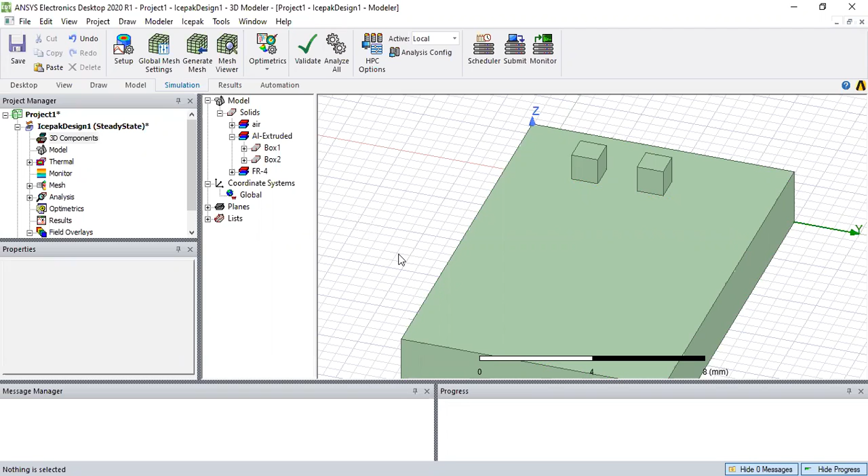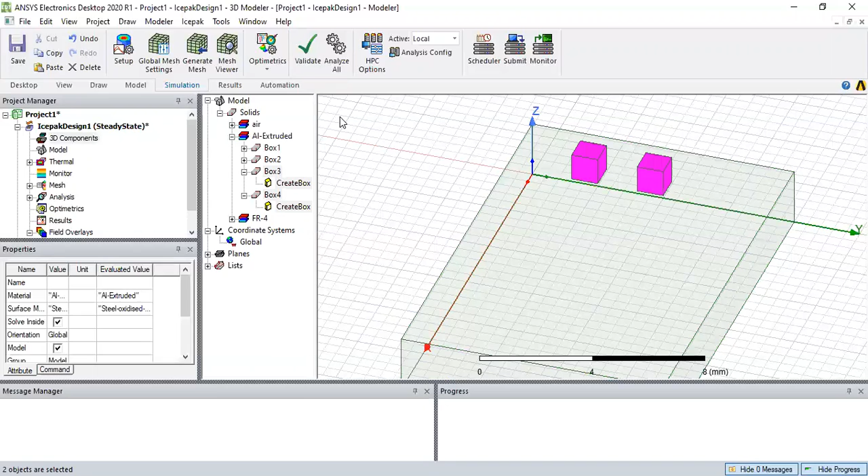First, let's double the number of components on a board, basically the blocks. Select both, and then copy and paste. You will notice that though the block number has doubled, we do not see them. That's because they are currently overlapping. For now, we'll have to move them, but instead of moving them one at a time by changing their point of origin, we'll move them by vector.

We have to go to Edit, and then to Arrange, and then Move. Now we can move them by vectors along the X, Y, or Z axis by holding X, Y, or Z on the keyboard. It says this again at the bottom in blue letters. So now select the top of one, hold X, and now I can freely move it in the X direction.

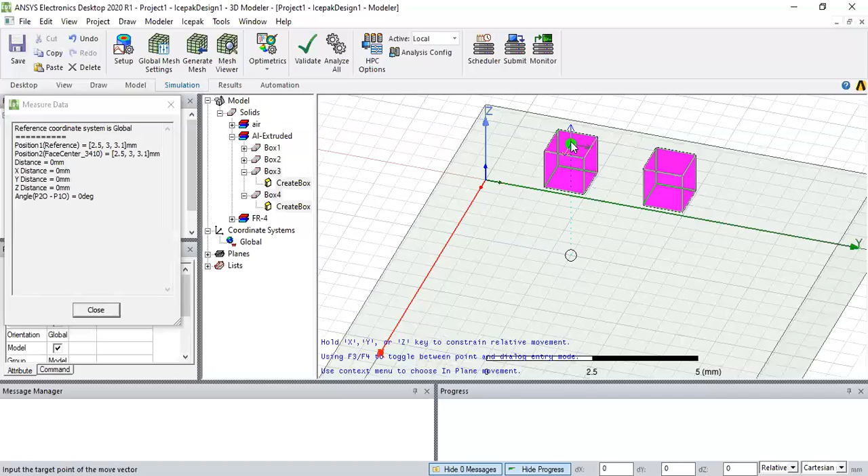If I do not hold X or Y or Z, then as you can see on the left, though I'm only moving it in the X direction, its height changes as well. But it needs to stay on the surface. So hold X and slide it down just a bit. And there we have it.

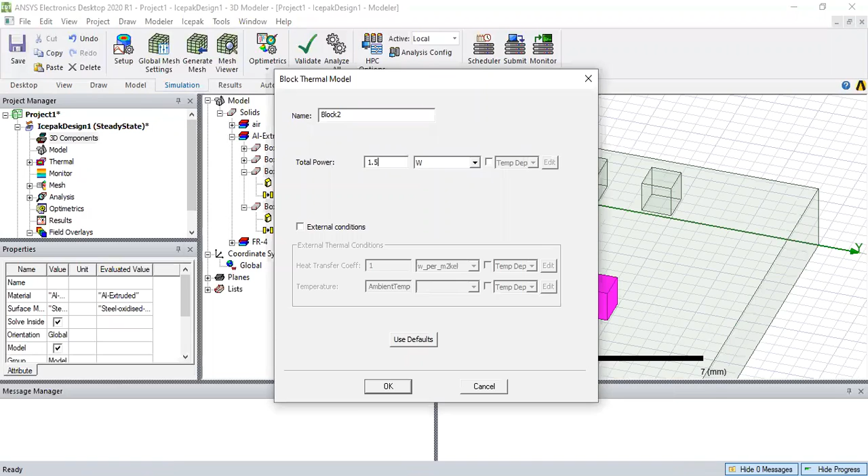Next, we'll also have to assign thermal energy to the blocks as well. Select both, as done last time. Assign thermal block and 1.5. Now we have 4 blocks and we can now create a heatsink. When generating a heatsink, it'll always appear at the global origin. To change this, we'll have to add a new coordinate system.

Go back to Draw, Operations, and Relative Coordinate System. We'll want to put it at the center of the block. And if you remember the dimensions of it, it is a 15 by 10 by 2.1. But if we want it to be above all components, we'll have to include the height of them. Because they're 1 by 1 blocks, we'll have to add plus 1 millimeter.

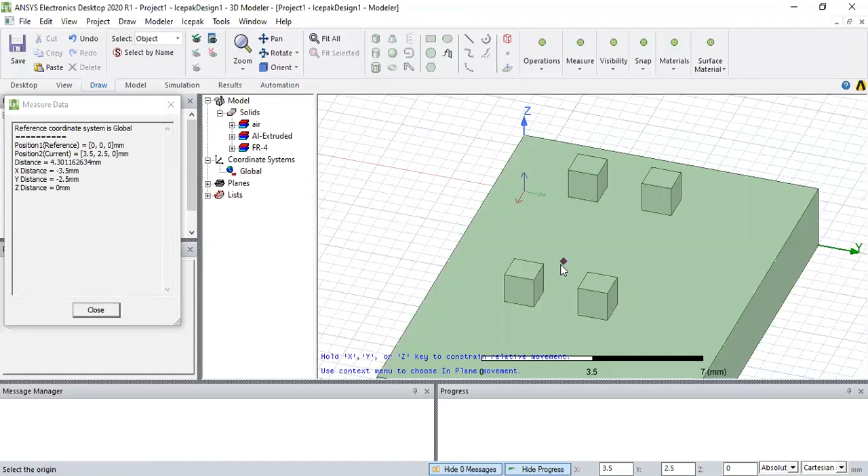So just click here, and then we'll change the origin here. Into Properties, an origin of 7.5, half of 15, 5, and then height 3.1. And there we have it. It is now at the center, at the height of all items.

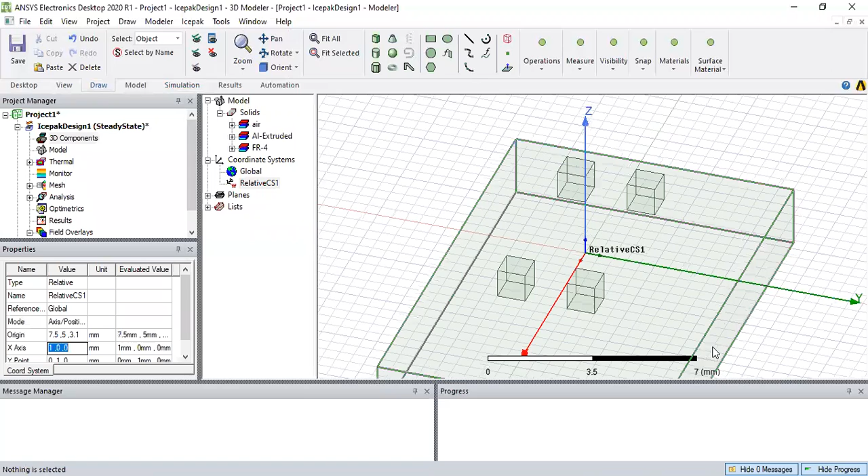Now to create the heatsink, go to 3D Components, right-click. We do not have any, so we have to create. You see Fan, Heatsink, and PCB. We'll select Heatsink, and you can already see an outline of the model there. Now we have to name it. It comes pre-named Heatsink 1. If you want to add more information, such as basing this on a real design, you can also include the company name and model number.

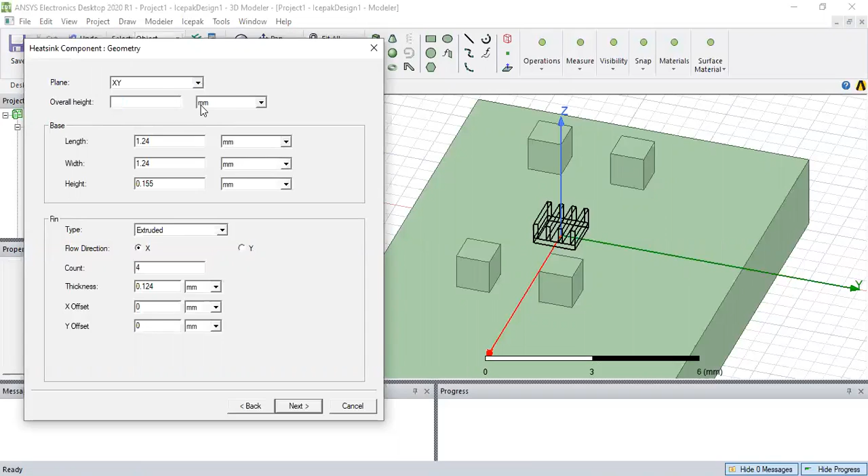So you can see here, this is the plane that it is currently the surface of, the XY plane. Changing this changes the direction of which way it's laying: YZ, ZX, and what we needed, the XY. Its overall height, such as the height of the entire sink, is changed here. We'll put 9.02.

Now the length and width also covers the base. So we'll just give it the same size as the board. Length crosses the x-axis, so that's a length of 15. Width is across the y-axis, that's a width of 10.

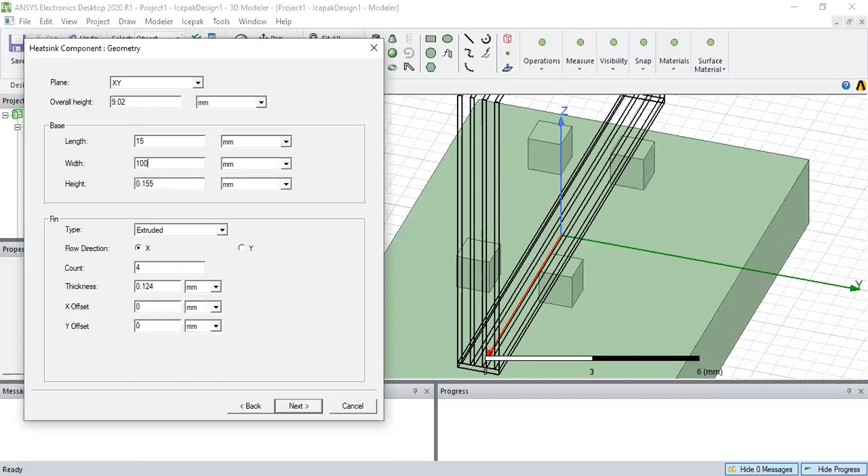Now, changing the height of the base does not change the height of the overall heatsink. That is done here. Changing the height of the base, I'll show you, only changes the base and will actually decrease the height of your fins at the top.

Relatively, the base is not that thick. It can be around, I would say, 10%. No, even less than 10%, probably around 5% of the height. You can check with other heat sinks you look up online. They will include some of their dimensions. For this one, we'll give it a size of 2.5 millimeters.

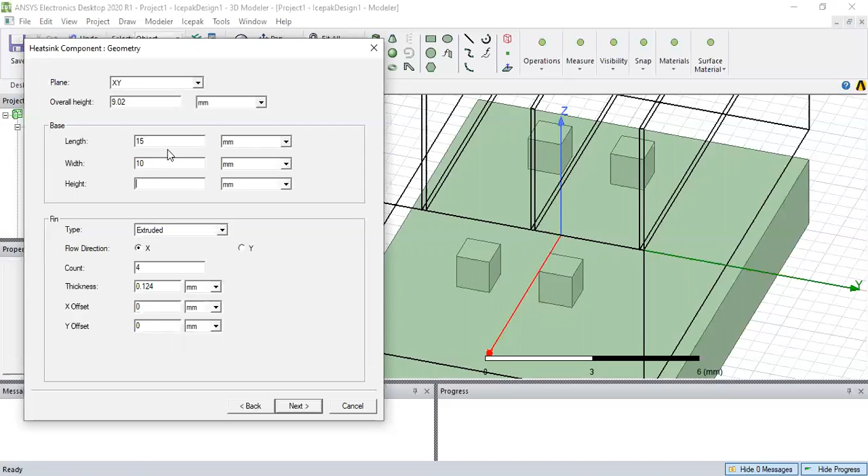And this heatsink type, as we can see here, is extruded. You just have 4 fins solid across the board. There is also cross-cut extrusion, which is similar, but now those bars are separated into single squares, which you can increase in size here in thickness. And then there are cylindrical pins, and now there are cylinders, so the airflow can move in any direction through them. Extruded is fine to stay with, unless you choose the cross-cut extrusion or cylindrical.

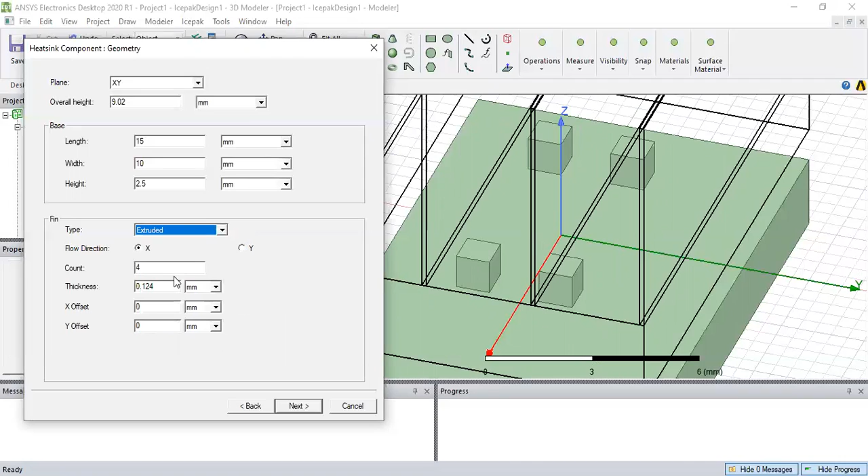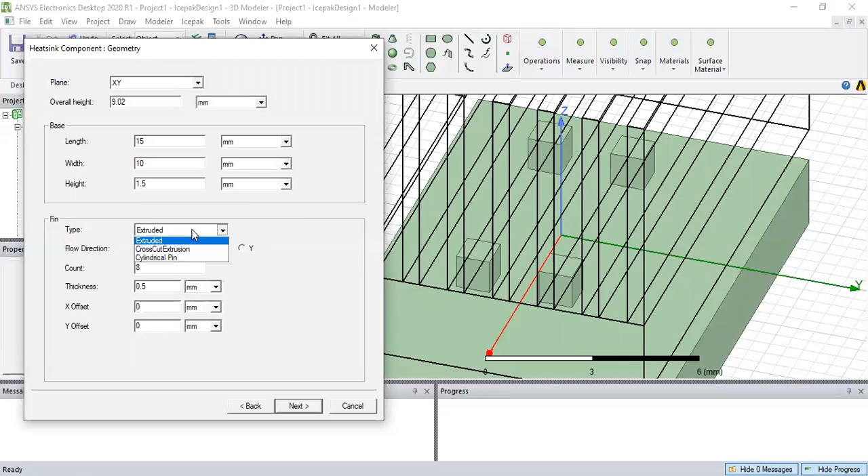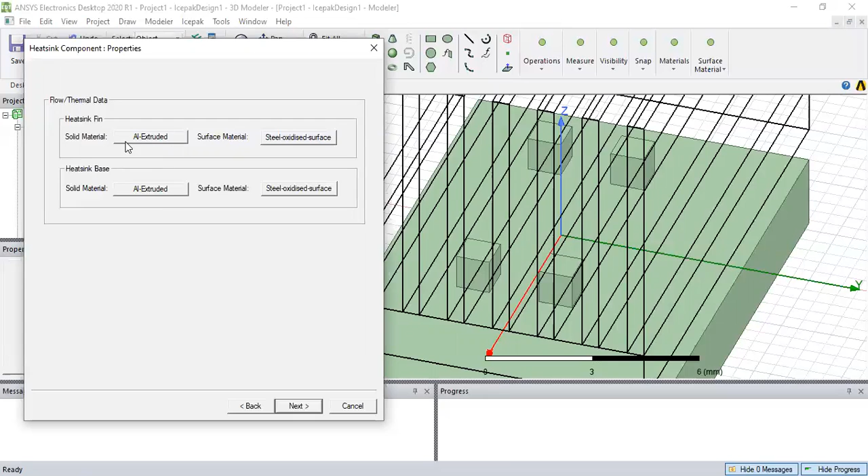We'll double the fin count to 8, thickness of 0.5, and we'll just decrease the base by 1. Make it 1.5 instead. There. This is currently fine for the material for the heatsink fins and base, and we can change it similar to how you change all other elements in the materials, but for now we'll just stick with this. And we'll finish, and there it is. It does come out as transparent, and I'll show you how to change that as well.

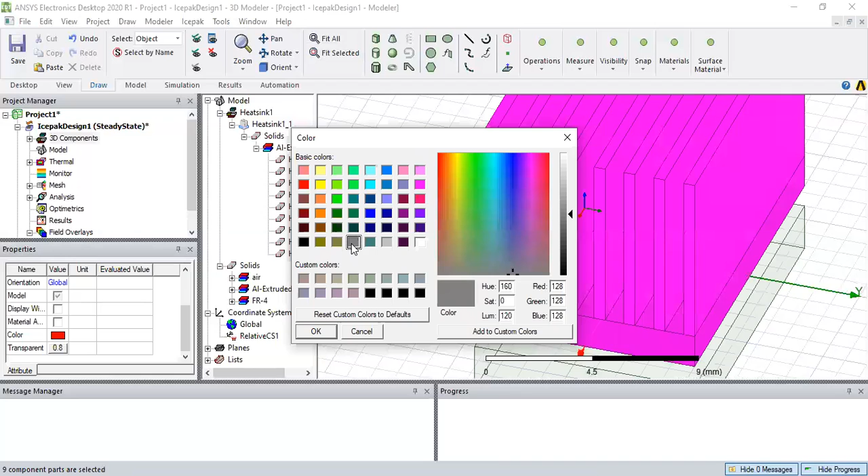You must go to Solids, right-click, select all, and then go to Properties. As you can see here, its color is red. We'll give it more of a metallic color. And from transparent, we want opaque. There. Now it is solid. Okay. And now we'll validate the simulation. And I will analyze all. I'll come back to you with the results.

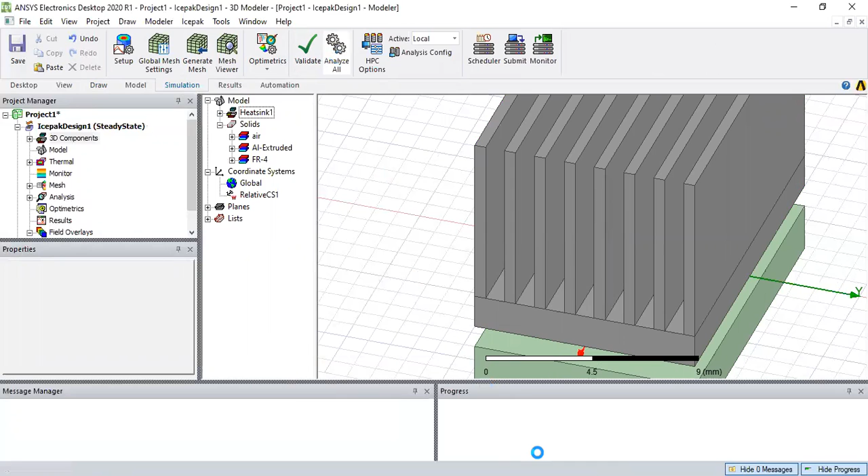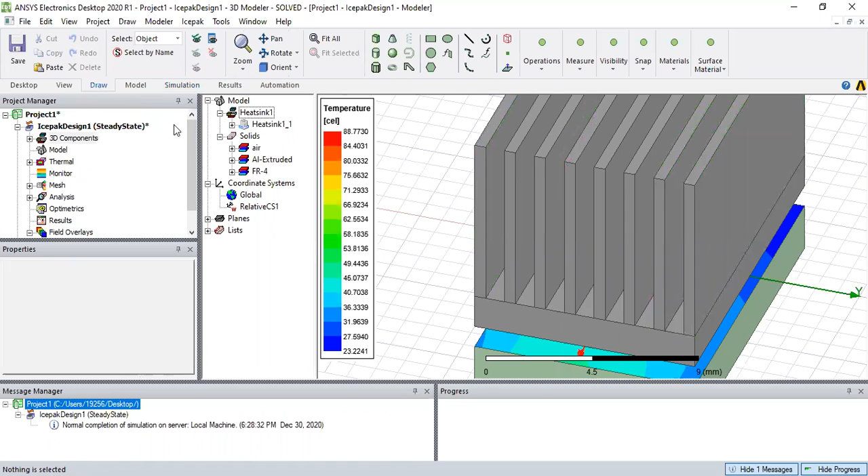And now the simulation has finished. Normal completion on server. And look at this. 88 degrees Celsius. In a previous video, if you have seen, this was in the near thousands. Now it is at a very nominal level, but we can't quite see the model. This can be fixed by hiding the heatsink. Go back to Draw, select the heatsink, and then hide it. It is still there and it is still active, similar to the region, but we just can't see it, and

that is fine. Go back to Field Overlays, select Temperature, and now I can see the surface at the junction points between the blocks is what we care about the most. If there is another item on top, we would care about that as well. But between the board and the component is where we're trying to minimize the most amount of heat. 88 degrees Celsius is fine, but with other types of heat sinks, you can get it lower.

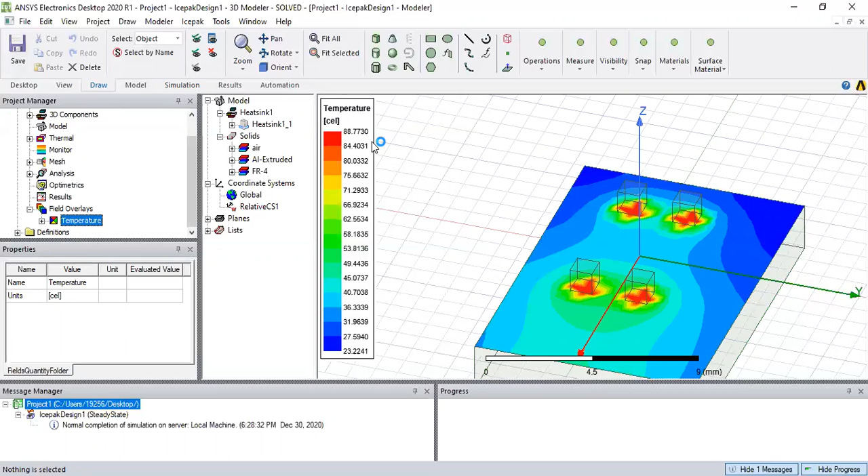A second way of adding a heatsink in Icepak is to select from its component library. First, we'll have to just delete the heatsink. And now we have to go to View, go to Component Libraries, and here we have it. You cannot actually see the heatsink until you select it. So if you see one, it's best to look it up online first. And if you don't and just randomly select it, you do not know what you're getting. I'll show you by doing this.

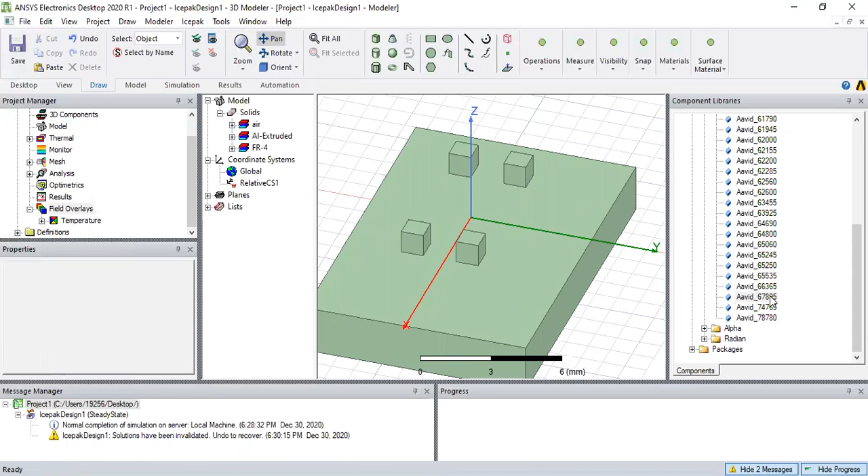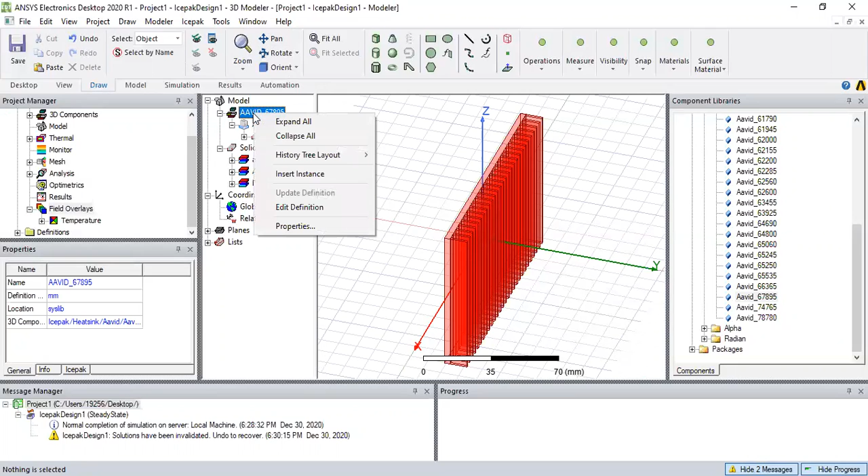It is far too large for the system, but I will still show you how you can manipulate this. Now you have to go back to the models, select it, right-click, and go to Edit Definition. You can see this name, but now we have to change the plane to XY, and that is fine. Now, we will simulate this again. I'll call you back when I have finished analyzing.

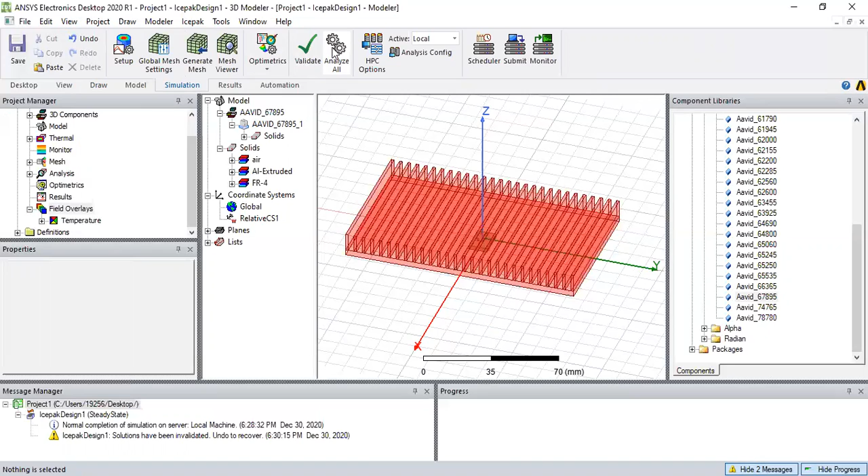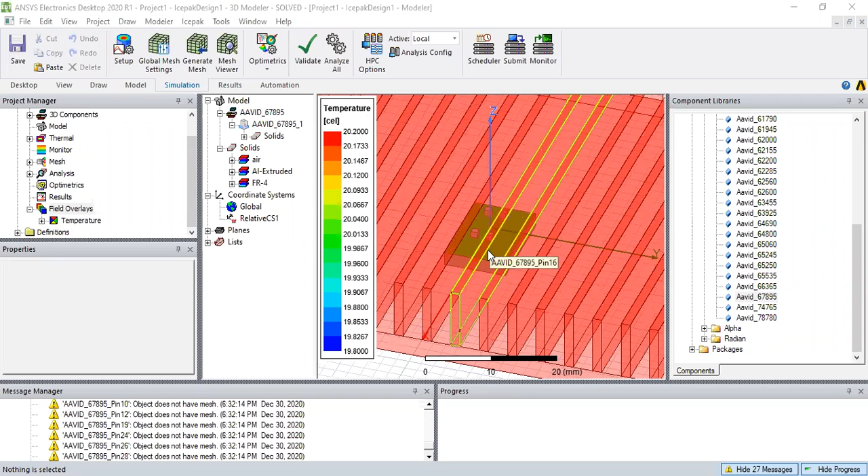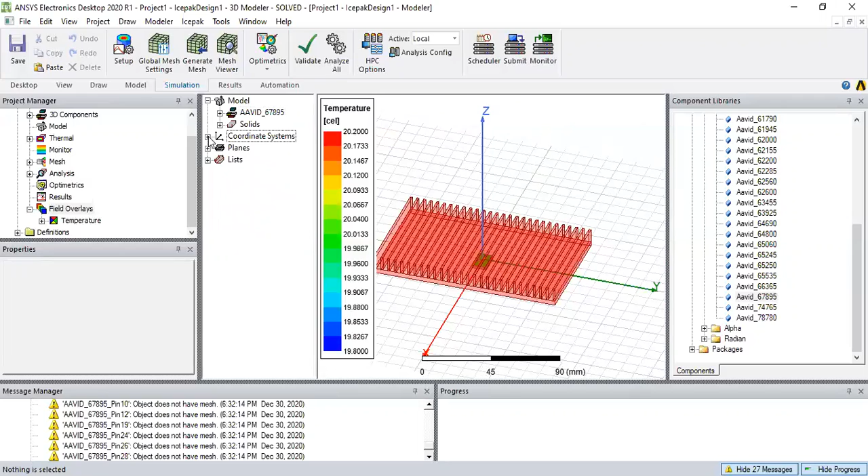Welcome back. And as you can see, with this, well, gigantic for its size heatsink, it has basically stayed at the ambient temperature. Now, as you can see, this is far, far too large of a heatsink for the system. But relative to its contact surface, it decreases the amount of heat that builds up at the junction. Now, in the next video, I will show you how to insert an actual PCB into ANSYS Icepak.